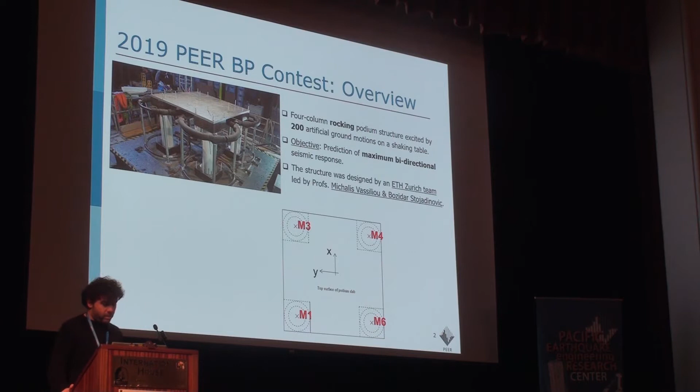predict the maximum displacement. Now, we could have asked for the displacement at the middle, but this means that if the table rotates, it would collapse with a 0 displacement at the middle. So we asked for the average displacement of the 4 columns. I forgot to mention that the tests were conducted at the University of Bristol, and they were supervised by Professor Mylonakis and Professor Sextos.

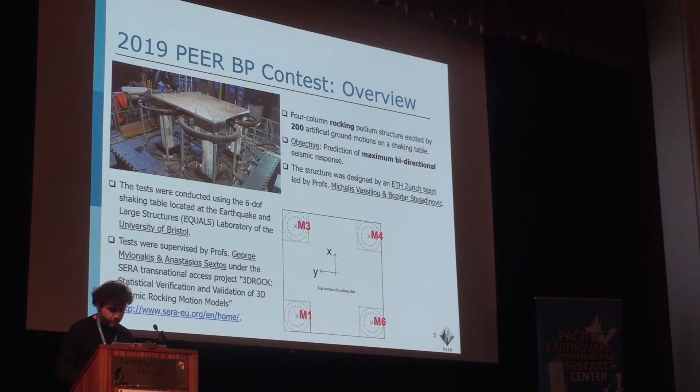So now these 200 ground motions were 2 sets of 100 ground motions. Each set was simulated based on 2 different seed ground motions. One was the El Centro ground motion, and the other one was Chichi ground motion.

And what we asked from the contestants was not to give us the displacement response motion to motion. We just asked the CDF of the maximum of the response, because in the end this is what you design for. Whether the maximum or the median value comes from one ground motion or the other, it doesn't matter for the design. What you care about is the statistics of the response. So this is how we evaluated the contestants.

We had 13 teams from 10 different countries, and for each team we measured the difference of the 2 CDFs, the one they provided and the experimental one, the vertical distance. This is the Kolmogorov-Smirnov distance. The statisticians prefer it, but we could have asked for the horizontal distance too. And for each of the contestants, we added the two errors from the two sets of ground motions, and this is how we ranked them. Professor Stojadinovic will announce the winners.

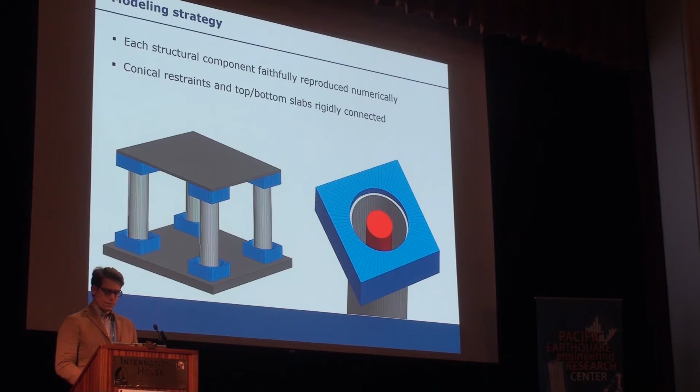And so in this case, each structure component has been faithfully reproduced numerically, including the conical restraints, in blue color. And we have assumed that the top and bottom slab were rigidly connected to these restraints. And in this case, the system nonlinearity has been lumped into column-to-restraint interface springs. You can see those are basically the black dots on the right of the slides.

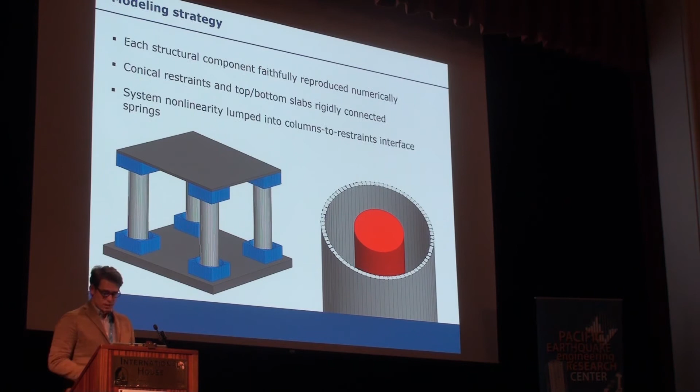So thanks to this simplified modeling strategy, we were able to obtain results in a reasonable time frame, I would say, which is challenging in the discrete element framework. And so apparently we did fairly well. So thank you.

So then Daniela will get all these 3 plaques. Great. To deliver to all the other team members of the team. So congratulations again. Thank you for taking part. Thank you.

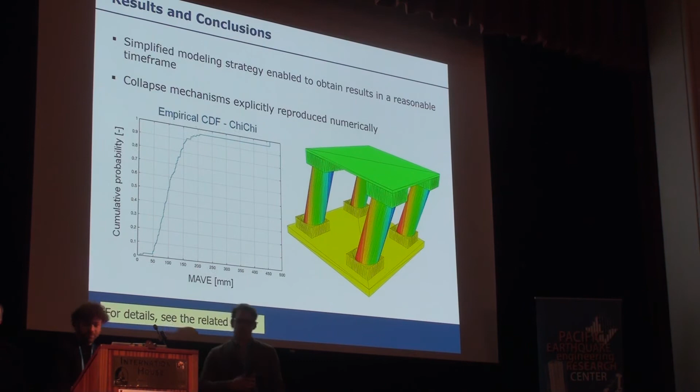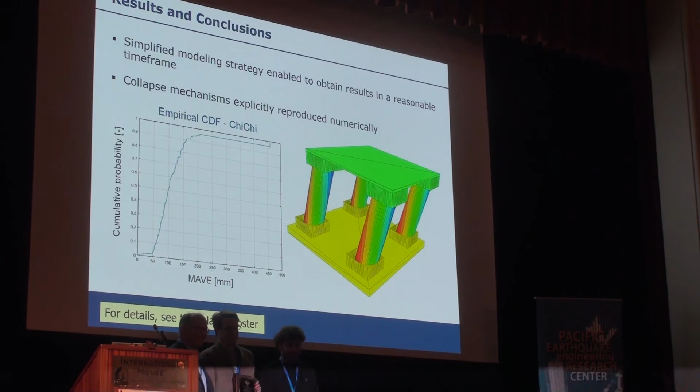We can skip it. All of us? 3 of you. The 3 of you take a photo. Is it mine? Yeah, you. Oh, okay. Okay, let's take 3 because there are 3 of you. Can Photoshop them. Yeah, exactly. So we get a pixel each. Huh? Thanks again. Thank you.

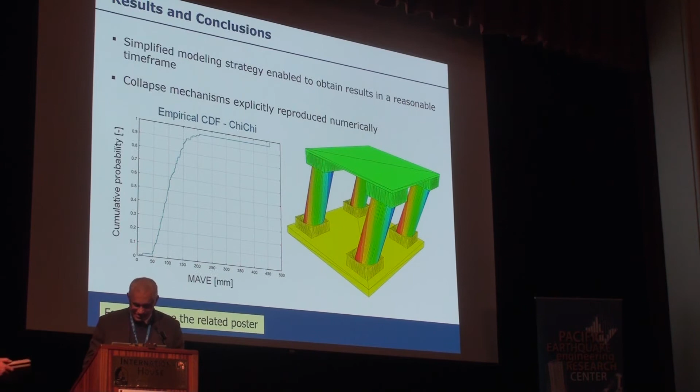Since the second winner was from Berkeley, I couldn't announce that. That's illegal. So the first place was from University of Toronto, and Myron is here. Please come on in. So Professor Christopoulos and his student Myron did the best prediction of the experimental results. Selim has been very helpful with the ETH team in setting the rules and following up on the submission. So we will present the award together.

So since it's only Myron here, you can also have the 2 of them. 3 of you. 3 photos should be 2. One for each of us. Thank you. Congratulations. Okay. Thank you, everyone.

I'm very honored to be here, and I'm very grateful for PEER's invitation. It's actually my first time in California. I've been having a wonderful trip and a very inspiring learning experience. So a big thank you. Now I'm just going to briefly talk about the modeling approach and some findings from this contest.

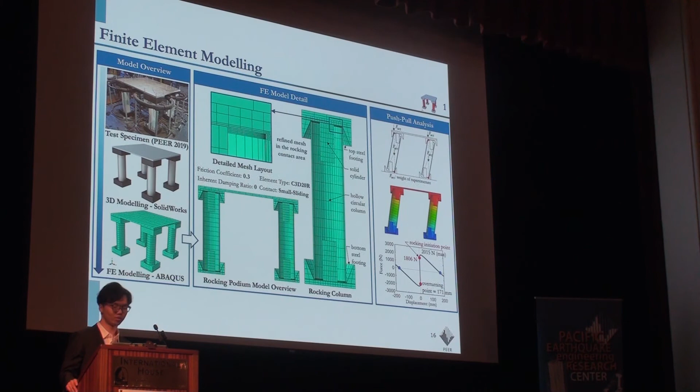And during this modeling process, there are many modeling assumptions we have to make. After we made the first model, we ran a quick push-pull analysis and checked with our hand calculations just to see if our model is reasonable or not. And then before we started with the dynamic analysis, the study was preceded by some sensitivity analysis. We were looking into many parameters that we think could potentially affect the rocking response of the structure. So I will be attending the poster session tonight as well to present more details.

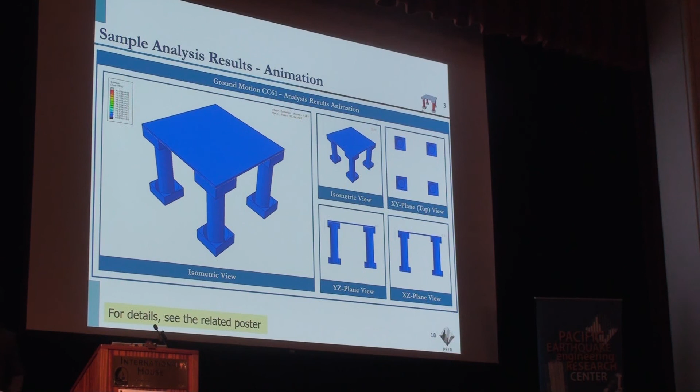So yeah, these are wonderful activities that we like to continue doing. So if you have a cool experiment and you would like to put it out for blind prediction and you haven't published the data yet, please let us know. We have a very nice mechanism on how to prepare the material for that. We will work with you in terms of what you think is the important criteria so we can evaluate the contestants. We have a pretty well-established process in how to announce things.

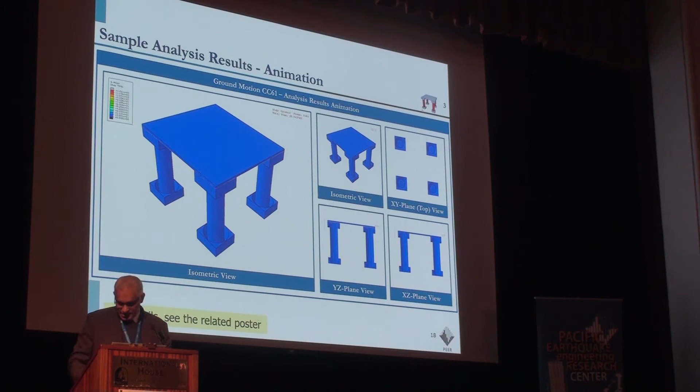Mainly, we will need to put it out sometime around September so we can give the contestants a month or two, depending on how hard the problem is, so we can get results evaluated, inform them, and you have to factor in some time for them to buy their ticket and fly from Canada or like last year from Japan, and so they can attend the annual meeting and you can applaud them.